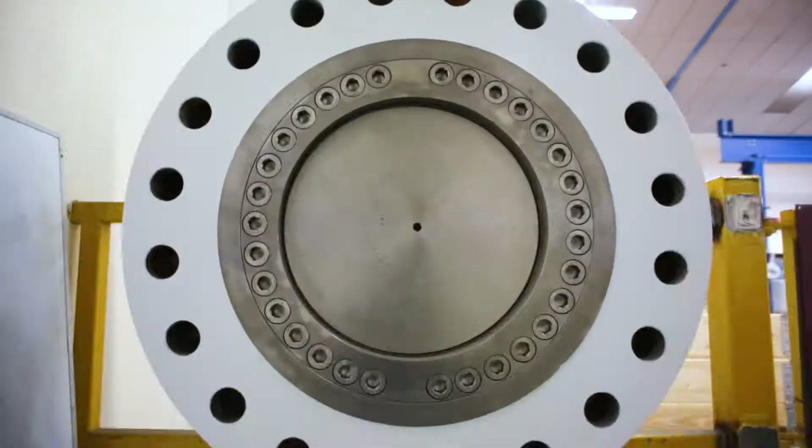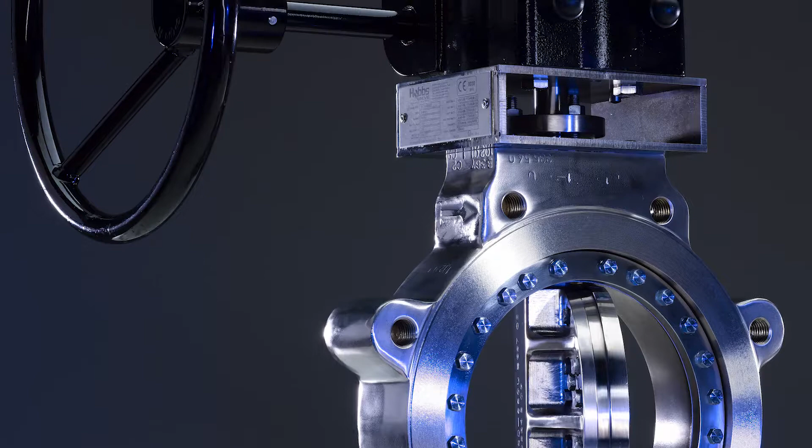Hobbs Valve are a specialist manufacturer of metal-seated triple offset butterfly valves, covering a vast spectrum of industries. I'd say oil and gas is probably 60% of what we do. Marine is catching up - we're basically the new kids on the block. For a triple offset manufacturer being 15 years old, that's relatively new, and we're known as the innovators.

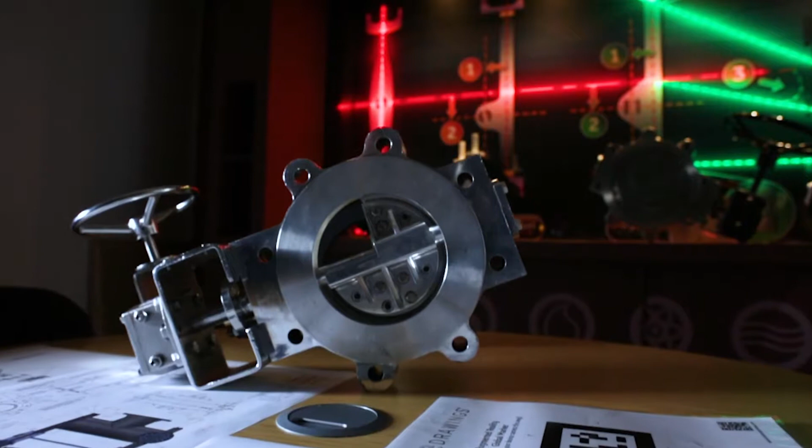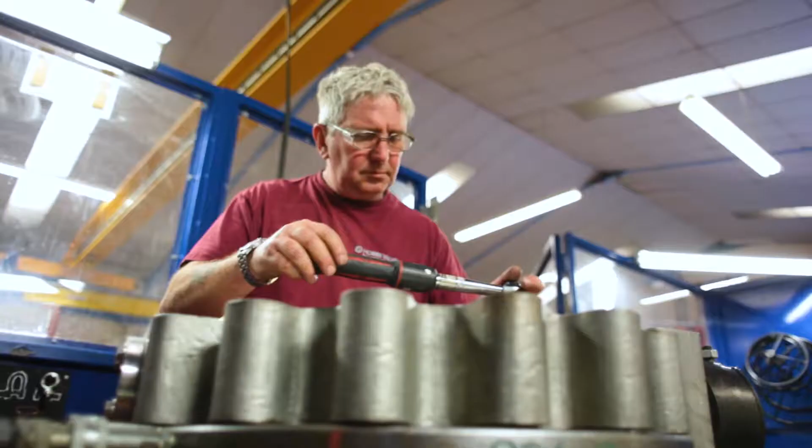The organisation was founded around 14 years ago by Alan Hobbs when he identified some inherent flaws in the traditional triple offset design, and using modern machining and modern design technologies, eliminated them. We win projects not on price, it's usually on technical aspects, so the features and benefits that Alan Hobbs designed within the product are what put us above our competition.

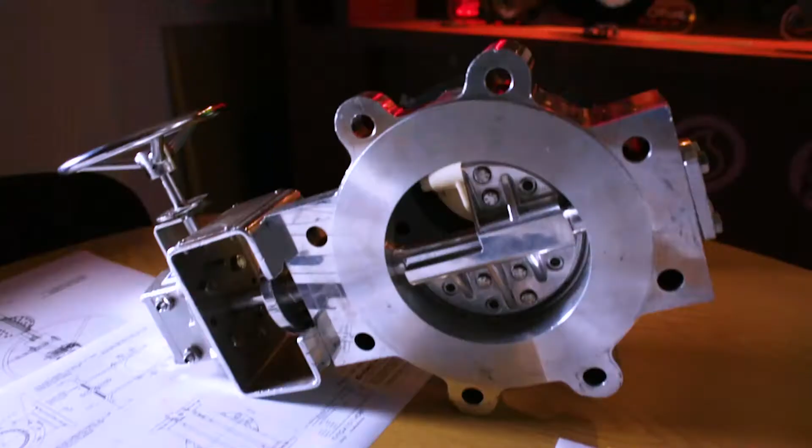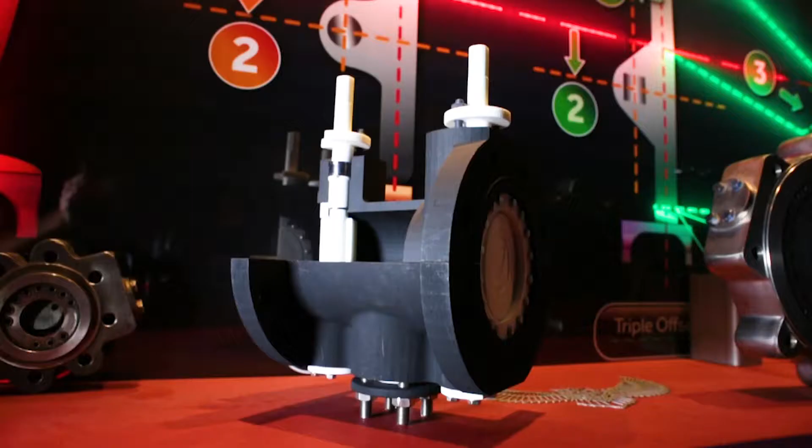SolidWorks we've used from year dot really, from the inception of the company 14 years ago, and we use it in all aspects, from the start of designing a product. I use it myself as a sales tool when I'm out on the road. It's utilised throughout the company, from concept to really manufacturing a valve.

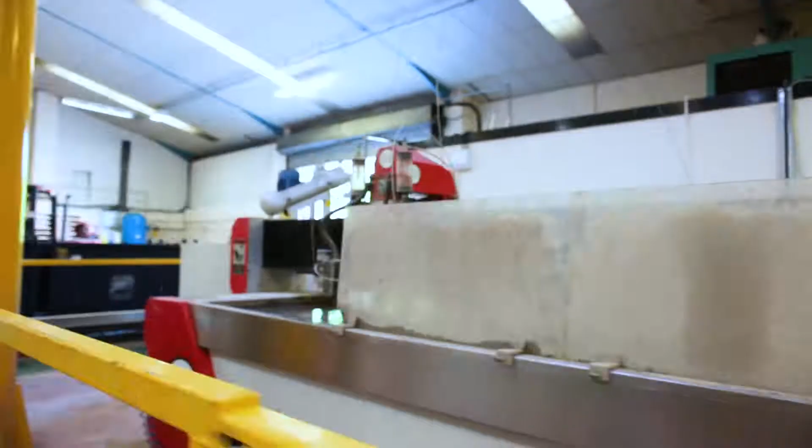It's incredibly important, particularly for the type of organisation that we are, because we deal with a lot of bespoke manufacturing options, and it allows us to provide solutions for our customers and design bespoke options for them.

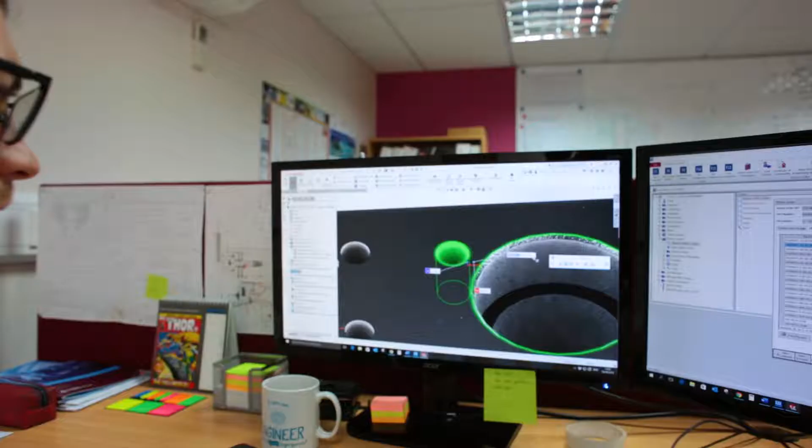The user interface on SolidWorks is by far one of the best. If you use any other type of software, everything's a bit dated, whereas SolidWorks is quite up to date, everything looks quite clean, nice. As someone who isn't an engineer, I find that I've been able to pick up SolidWorks quite quickly and learn to navigate through the system very easily to be able to support the guys where they need my assistance.

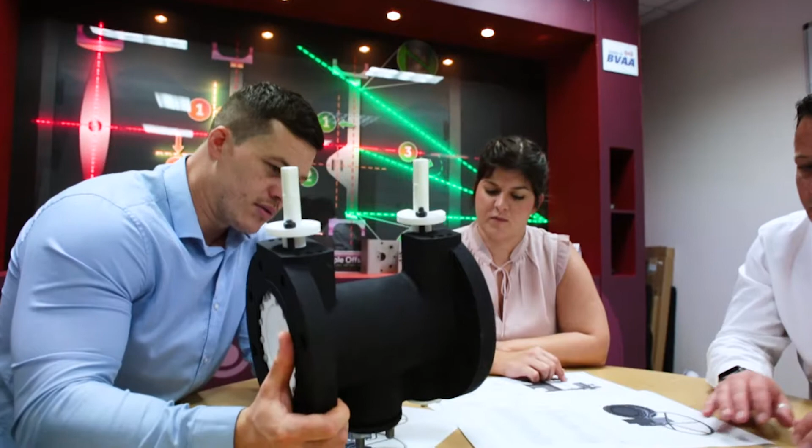I tasked the in-house design team to produce 3D printed models for us, from carting around 20-30 kilo valves all over the world - isn't much fun. So the 3D printed models, after using SolidWorks programs, takes that down to less than a kilo, and it's just a lot easier for me.

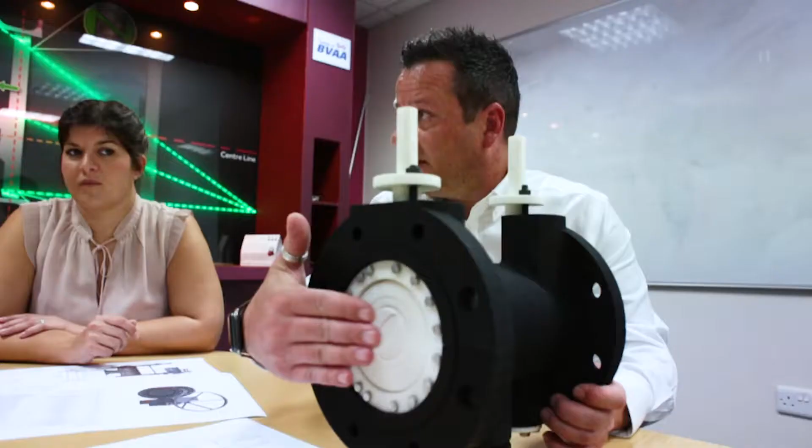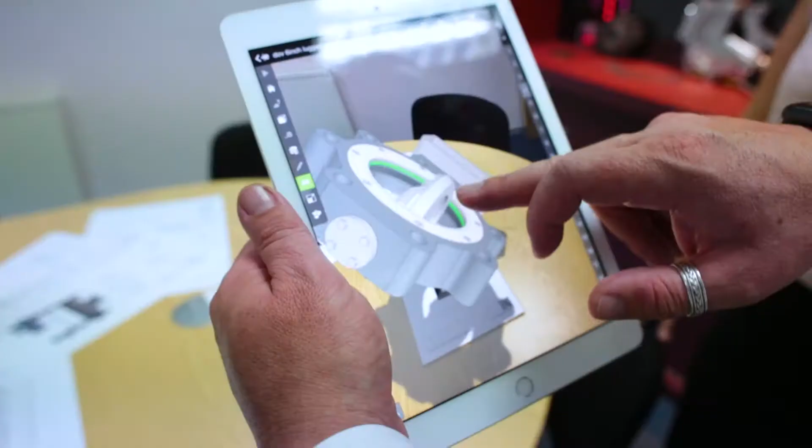I use augmented reality on the iPad. Augmented reality and 3D printing kind of come hand in hand - it helps bridge engineering and sales together. We use a QR code printed on a desk, then utilising e-drawings through SolidWorks programs, we can generate augmented reality - full 3D models that we can move, highlight certain sections of the product, and really home in on certain features and benefits that we're trying to offer the customer.

It's all about visualisation, isn't it? And it's seeing is believing for me. We had to have loads of renders - every drawing's got a render on it.

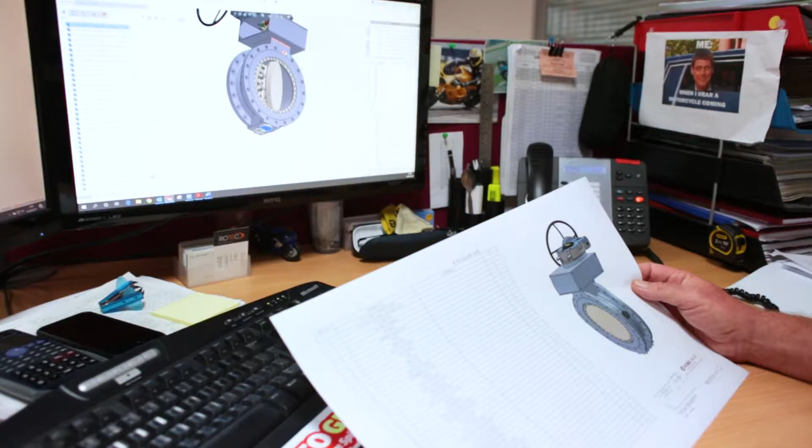The guys within our engineering teams are actually building models, so all the various valve components, every single nut and bolt. Our production design guys will take that into the machine shop, so 5-axis CNC is all programmed again through SolidWorks, right through till the valves go out the door, assembled and tested.

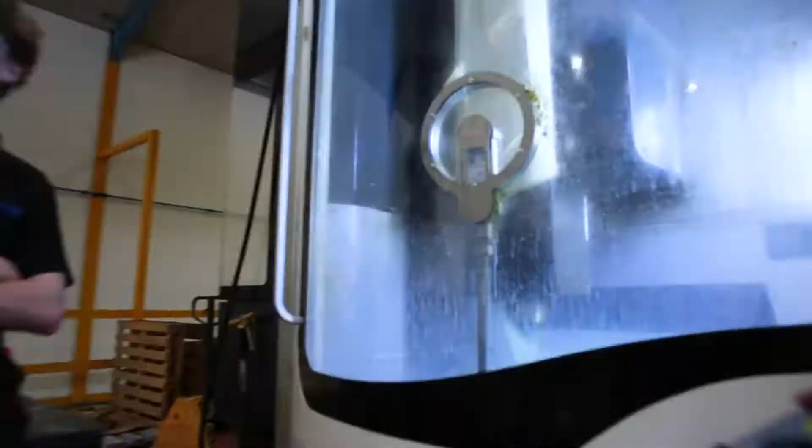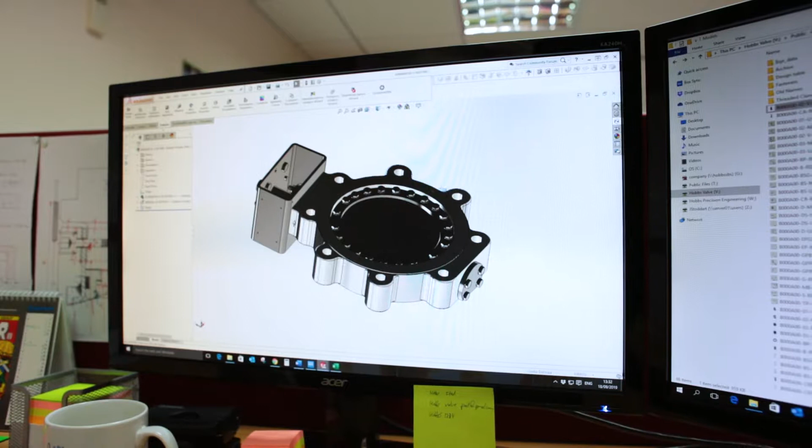We started using design tables, and design tables are really good because we can lay out everything on Microsoft Excel - what we want to do, plan all the dimensions before we actually jump into SolidWorks and start designing. So we can plan out all the dimensions, all the tolerances, all the gaps, and then import the design tables into SolidWorks, and it will just make the model for us. It makes everything a lot faster because we've been able to make a range with just a couple of people, really fast.

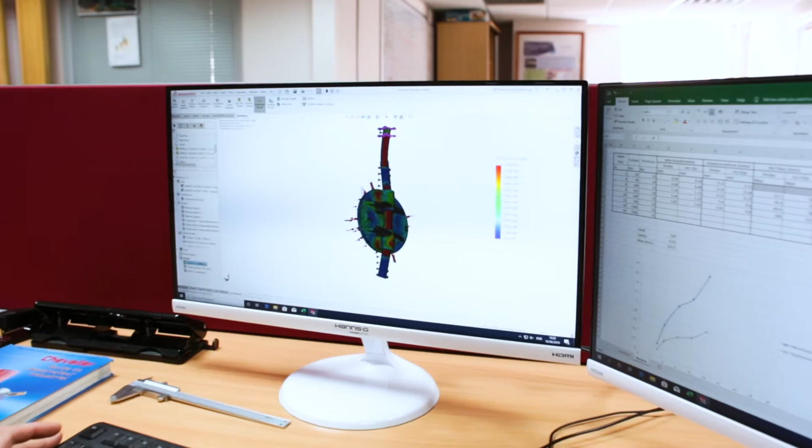It's not just the only thing we do - we also do structural analysis. Once we've made everything, we have to make sure that it stands up. There's only so much you can do using calculations, but we use finite element analysis. Simulation saves a lot of money, because if you weren't simulating, you would be spending a lot of money on physical tests. If you wanted to find out when your shaft is going to break, you would have to literally break your shaft - it saves so much money.

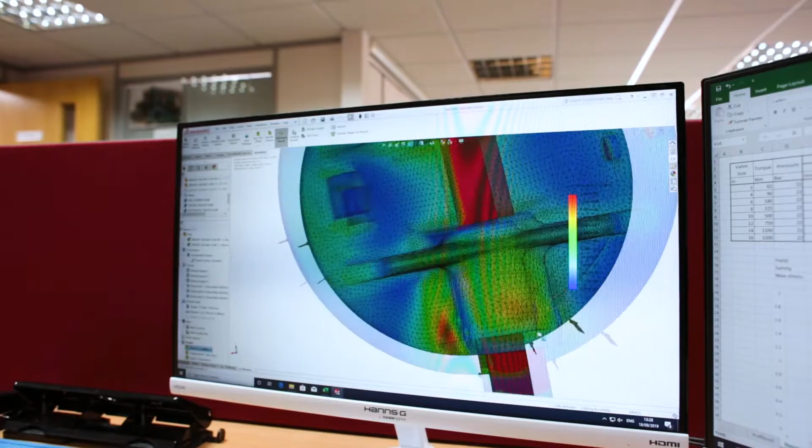The future for Hobbs Valve as a whole, I think, is product development - further product development on the triple offset, looking at our other products that we don't utilise as much, like double block and bleed, cryogenic applications as well. And I think SolidWorks is the way forward for that, from concept right through to production.